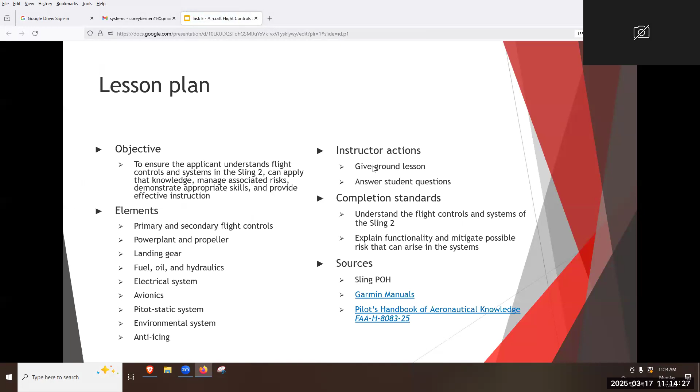All right, can everybody see this? I'm not going to put it in slideshow view so it's easier for us to bounce around. How does everybody feel with the primary and secondary flight controls? What are the primary flight controls? Cool. What about secondary?

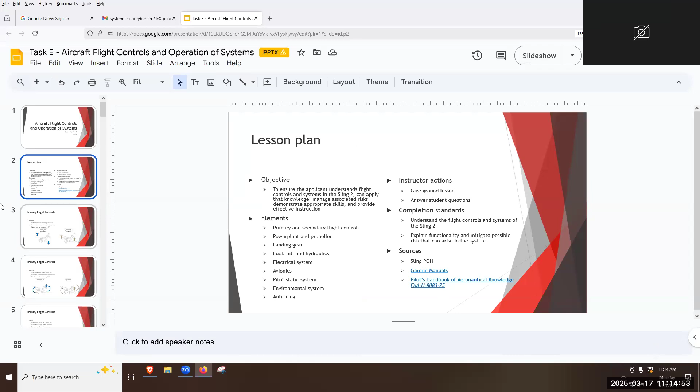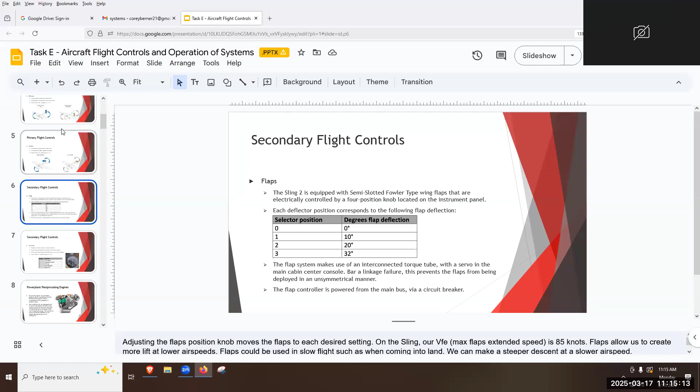Trims, flaps. Cool. On some other planes, not on ours, there might be other secondary controls like the spoilers and speed brakes, stuff like that. But for us, it's just going to be the flaps and trim. Are the flaps and trim mechanically or electrically powered? Cool.

So when given the question of describing the Sling engine, you can use the acronym RHANGO4, meaning Rotax 912 IS, horizontally opposed cylinders, air/liquid cooled, naturally aspirated, gear reduction box. Does anybody remember the gear reduction ratio? 2.43 to 1.

It's right here. No. Oh, it's on the board? No, it's. Oh, it is. Okay. It is on the board. Well, that's good. We weren't using those though. Good.

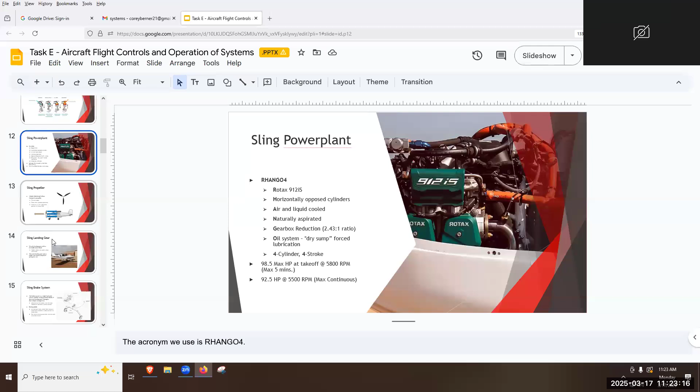All right. So fuel system, just some basics of the fuel system. We have the fuel capacity of 19.8 gallons per tank, making it 39.6 total. Unusable fuel is half a gallon per side, so 1 total. That's due to the fuel that's in the fuel lines or at the bottom of the tank. Our fuel burn is 3.5 gallons per hour on average, but we do have a chart in the POH that shows the fuel burn at different RPM settings. But we use 5 gallons per hour for safety and ease of calculation, just to give us a little bit of a buffer.

The average fuel pressure should be between 40.5 and 46.5 PSI. If you see anything lower or higher than that, it will start indicating yellow on your fuel pressure gauge. And then we use a combination of avgas 100 low lead and MoGas 91 octane. What color would pure avgas 100 low lead be? Light blue. So because we use that MoGas avgas combination, you're still going to see a very slight tint of blue, but it's going to look more clear than blue. If you just got avgas, it'd be pretty blue.

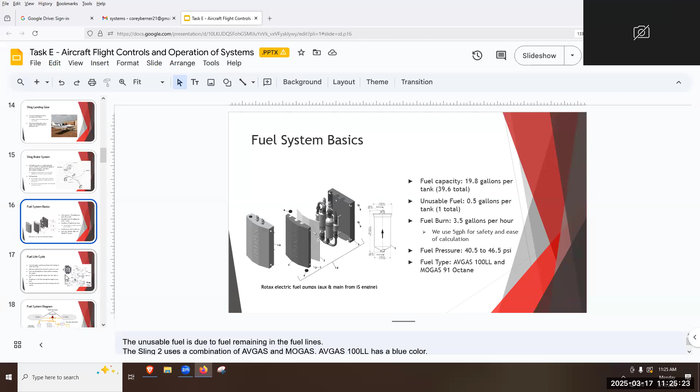Any questions about the fuel system basics? What was the general fuel pressure that you would see? Was it 43, 44? I would say around the 43 or 44 range. Yeah. Cool. Okay. So the life cycle. I'm just gonna read through this and then we'll go and look at the diagram.

We have 2 fuel tanks, left and right, located near the fuselage on the inside of the wing. Only 1 tank can be selected at a time, unlike the Cessnas, which use both. That's because they are gravity fed and ours is powered by a fuel pump. So we can only have left, right, or off selected. Hopefully you're not in this situation, but if you end up in an emergency where you have to turn off the fuel, you can't just turn it to off. You have to pull the little red circle knob in the middle, and then rotate it. So it doesn't just turn left and right like it does between the tanks.

You actually have to pull it up and then rotate. So I know in emergency situations, you don't think straight and you might be like, oh, why isn't it turning? Why isn't it turning? Well, you just have to lift up and turn.

The fuel runs through 3 different filters before reaching its engine. The fuel flows through the engine from right to left, and roughly 20 gallons of fuel flow through the engine per hour. I know some people have said, what was it, 22 or 23? Somebody was saying that a different instructor said that, but roughly 20 gallons of fuel flow through the engine per hour. Doesn't mean that it's burning 20 gallons per hour, it just means 20 gallons are going through the system. The fuel becomes pressurized after reaching the fuel pumps.

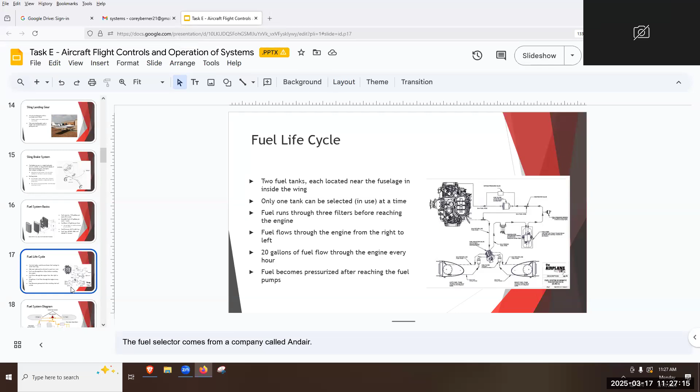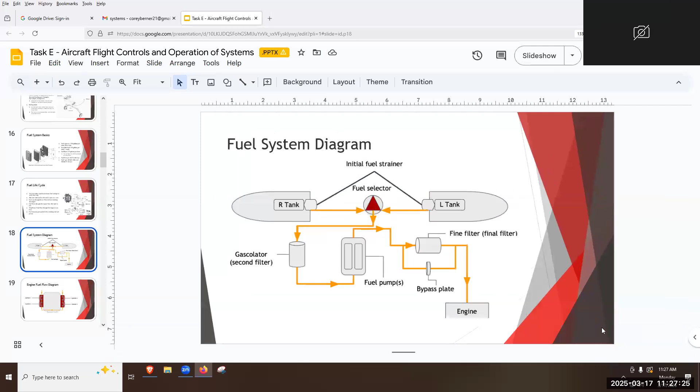So our fuel diagram, oops. Our fuel diagram is going to be right here. So starting from the tank that is selected, it's going to pass through the initial strainer. There's an initial fuel strainer by each tank. So regardless of what tank you have selected, it'll pass through the initial strainer. From there, it goes through the fuel selector and then through the gascolator, which is the second filter. It's also the lowest point in the fuel system.

So if you do find water or other contaminants, most likely it'll be in the gascolator, but that doesn't mean that you can't find it in the wing tanks as well. But the reason you would find water there is because water is denser than fuel. So when you do sump it, if there is water in there, it'll be at the bottom and then the fuel will be sitting on top.

From there, it'll pass through the fuel pump, which are electrically driven and powered by the ECU. We have a main and aux for redundancy purposes. From there, it's not on here, but after the fuel pumps, as we talked about, is where it becomes pressurized. So there is going to be a pressure sensor directly after the fuel pumps.

From there, it's going to pass through the fine filter, which filters out any very small debris or contaminants. So it is the most susceptible to become blocked if larger debris does make it through. Over time, it could block the fine filter, which is why we have a bypass plate, which will allow fuel to flow through that rather than getting clogged and stopping the fuel flow.

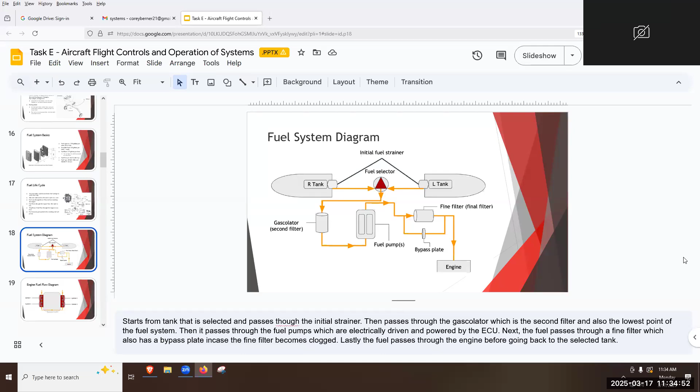Right. Cool. So as we mentioned, right to left. It's going to flow through cylinders 1 and 3, which are on the right, and then through cylinders 4 and 2 on the left, before going through the pressure relief valve and then back to the selected tank. Any questions on the fuel diagram?

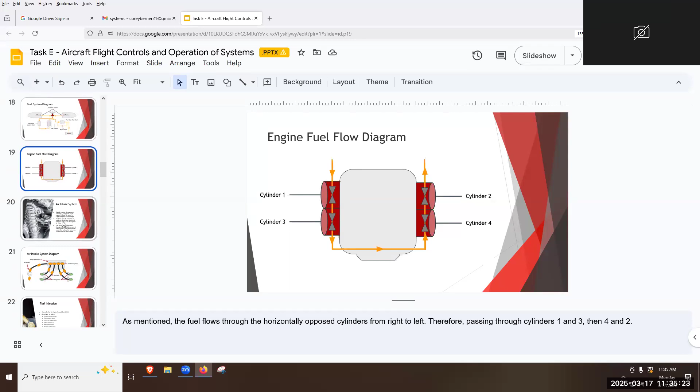So we'll talk a little bit about the air intake and fuel injection, since those are technically a part of the fuel system in a way. The air intake takes outside air, naturally aspirated, meaning it just flows into the engine compartment without assistance, supplied to the engine without a supercharger or turbocharger. Air flows directly from the air intake to the air box or the manifold, where it passes through an air filter. The filtered air is then sent through the manifolds to each of the cylinders' fuel injectors, where the fuel and air are mixed before entering the cylinder.

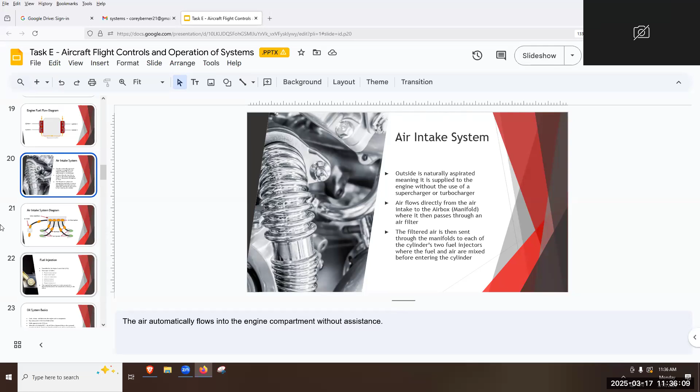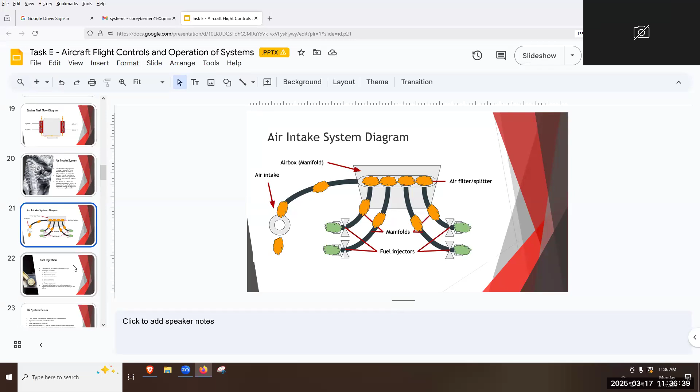So here's a diagram of the outside air flowing through the air intake to the air box or the manifold, where it then passes through an air filter. And then there are going to be 4 manifolds, like black hoses, I don't know if there's any on that diagram over there, that bring it to the fuel injectors. The fuel injectors then mix the air and fuel combination to cause ignition.

As we talked about earlier, the fuel injectors are controlled by the ECU, the engine control unit, which is the brain of the engine. It does it automatically through different input variables: throttle position, engine speed, intake air temperature, ambient pressure, manifold pressure, and exhaust temperature. Those are all variables the ECU takes into account when determining how much fuel the fuel injectors inject for that fuel and air mixture to be ignited.

So the air density, which is calculated in the air box, right here, determines how much fuel quantity is needed per period. And then from there, the spark plugs create the spark, which ignites that fuel and air mixture. Good?

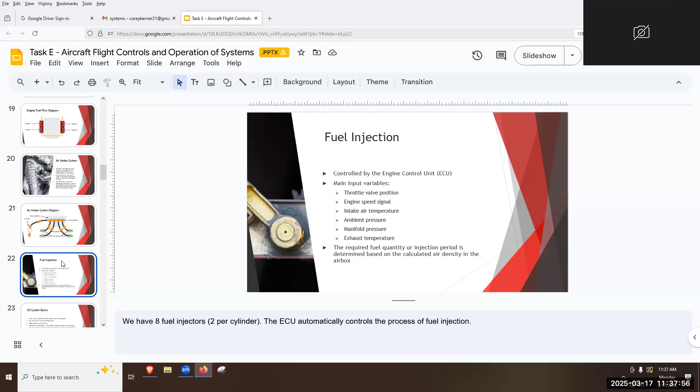All right, oil system. As we talked about, it cools, cleans, lubricates, and seals the engine and its components. It's dry sump forced lubrication. We have the external reservoir outside the engine, which then has to force oil back into the engine to lubricate. It holds approximately 3.5 liters. When the oil is below 50 degrees Celsius, the oil filter is bypassed due to the increased viscosity of the oil. Significant throttle settings must not be used during this period as it may cause damage.

Surplus oil emerging from the points of lubrication gathers at the bottom of the crankcase, from where it's forced back to the oil reservoir by piston blow-by gas. The oil used is automotive grade API SG synthetic or semi-synthetic. So we pretty much use car oil.

Yeah, and the reason we have the dry sump system is to help save space. If we had the wet sump, there'd be the pan at the bottom, like JT mentioned. It would require a lot bigger of a cowling.

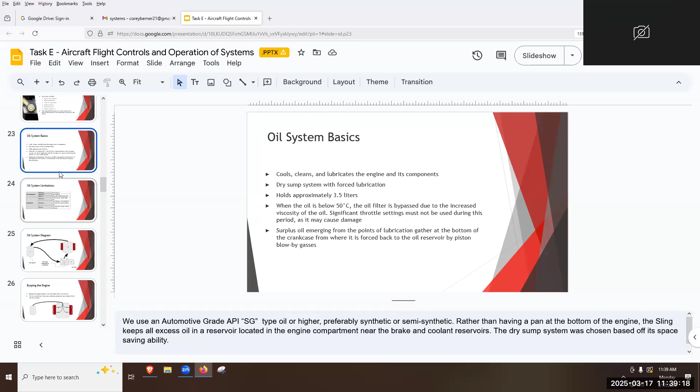Found in the POH, which may be different because they updated the new POH. But here are the parameters for the oil temperature and oil pressure. It's good to know. The system should indicate the oil pressure and temperature in yellow rather than green if it's starting to reach above or below these parameters, and then go into red when it's outside these parameters. They're found in the oil limitations in the POH.

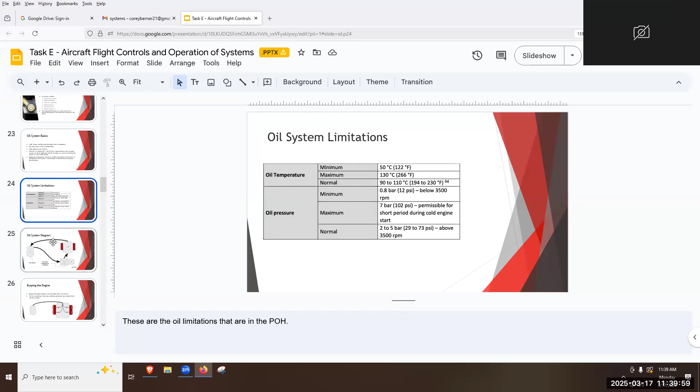So here's our diagram, four simple parts. We have the reservoir, which oil is pulled from by the oil pump, which is powered by the camshaft. It then passes through a filter before being directed to the engine. After passing through the engine, the oil goes back to the reservoir.

So if that oil pump for some reason goes out, then we will no longer be drawing oil from the reservoir through the engine, and not cleaning, cooling, lubricating, or sealing, which then inherently will most likely cause damage to the engine and probably shut it off. So oil is very important.

I just thought of this, but there's a war going on between Tacoma drivers and Jeep drivers, right? We hate each other, but why do Tacomas last longer than Jeeps? Because Tacoma drivers actually have common sense and know to get their oil changed on a regular basis. Jeep drivers can't do that. Are there any Jeep owners in here? No? I just towed last night. Exactly. There we go. See?

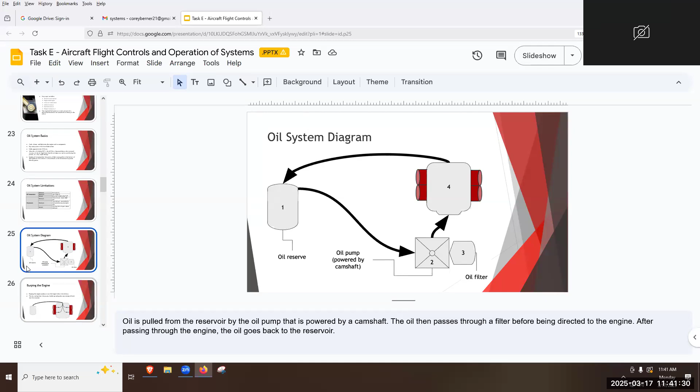But yeah, get your oil changed. Oil is very important.

Why do we burp the engine? I know it's on the screen, but why do we have to do that? To move oil that's stuck in certain places back to the reservoir, so you can get a count. Yep, so turning the propeller, there's going to be air coming from the pistons, which builds up and pushes any resting oil back into the reservoir to give us the accurate reading.

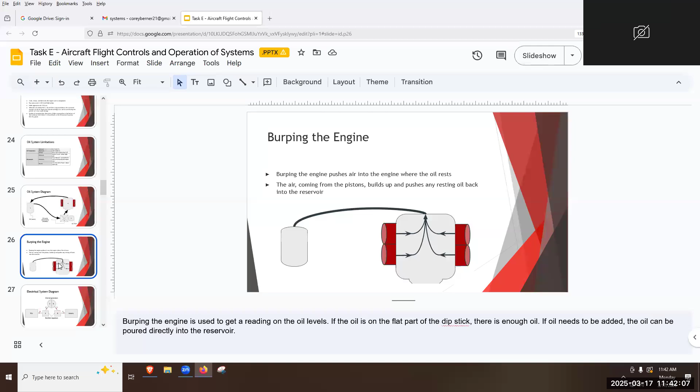Any questions on the oil system before we move on? Who understands the fuel system and the oil system? Who does not understand the oil or fuel system? Cool. All right, electrical system.

This is going to be very important for the Sling because a lot of things rely on the electrical system. We have two internal generators, generator A and generator B. They're both producing alternating current, which is then converted to direct current by the rectifier regulators. The power generated by generator A goes to the ECU, which controls the two fuel pumps, 8 spark plugs, and 8 fuel injectors.

The power from generator B goes to the battery, which powers the main bus, which then controls things like flaps, trim, lights, radios, avionics, autopilot. So we have a lot that relies on the battery. As we talked about before, some of you may not have been in here, but we had an in-depth conversation that probably lasted longer than it needed to about what a rectifier regulator is.

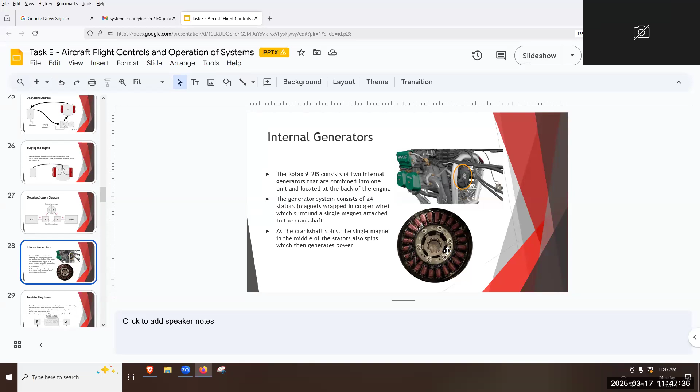Cool. So as we talked about the rectifier regulators, a rectifier is a device that converts an oscillating two-directional alternating current into a single directional current, direct current DC. And then the regulator is any electrical device that maintains the voltage of a power source within an acceptable limit. And as we saw, they're located on both sides of the fuse box, the little silver boxes on either side. So we have the rectifier regulator to convert the power, but also to maintain the voltage so we don't lose any of that power when we send it off to the battery or the ECU. Cool.

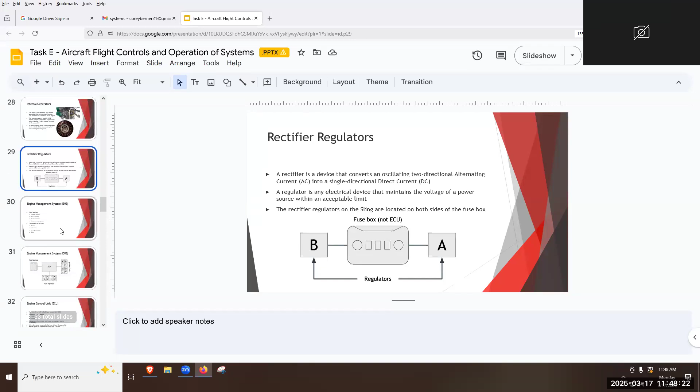Yeah, so going back a little bit to the engine, the EMS or engine management system is ultimately the overseeing entity of the engine. It's going to take care of ignition control, fuel injection, fault detection, and generator management. Within the EMS, there's different components such as wires, sensors, different harnesses, and the ECU, the ECU being the brain of the engine management system.

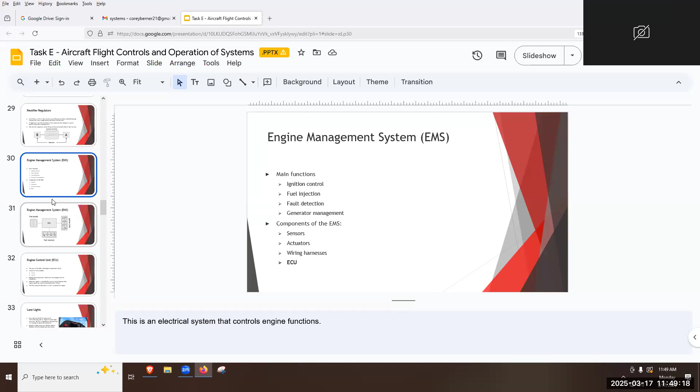So you can think of the engine management system as our entire body, us as people, and then the ECU is going to be our brain that processes and controls the important things within the engine. Here's just sort of a picture of the EMS. We have the ECU as the central core, controlling the fuel pumps, injectors, and the ignition coils. 2 spark plugs and 2 fuel injectors per cylinder, since we have 4 cylinders.

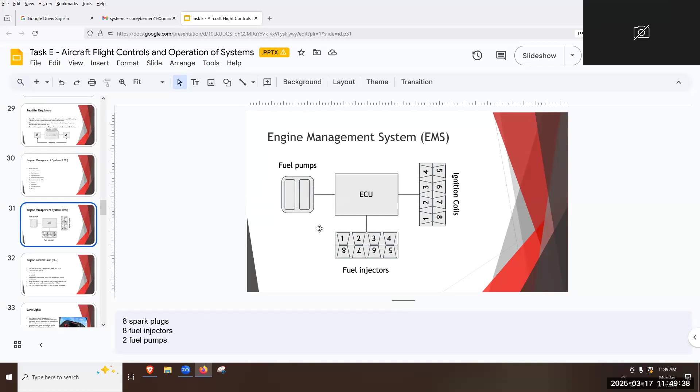Going more in depth about the ECU, engine control unit. It's the core of the EMS, and it consists of 2 modules. There are 2 computer modules, lane A and lane B, not to be confused with generator A and generator B. They're separate. During normal operation, both lanes are engaged for redundancy, just like with the fuel pumps, keep both on for redundancy. When it's controlled by lane A, lane B ensures that engine operation can be maintained after a failure, and the ECU automatically selects a lane to control the engine.

Lane A is the primary computer, lane B is a secondary computer. They're on the instrument panel, 2 switches with a light. The lights tell the condition of the 2 computers. So just like the check engine light in your car, if you see a lane light on, it's telling you that something is wrong.

We can then go into the settings page and view FADEC. FADEC is going to be like plugging the OBD2 sensor into your car at AutoZone, and it'll tell you what exactly is wrong. You can only see what's wrong when the check engine light is on. So same with the lanes: if the lane lights are not on, we can't see FADEC and what it's telling us to do, or telling us what's wrong. But once those lane lights are on, we could go in and view FADEC and see what the issue is.

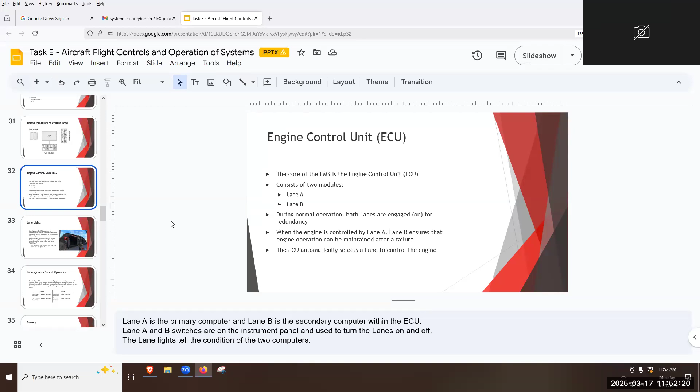And then if the other light's on, do the same thing, cycle it off, cycle it on. The light should go off and you should start feeling the engine run a lot smoother and see all of our instruments within the engine page. There is going to be, I don't think I have it, it might be at the end of this PowerPoint. But we'll get around to that. Yeah, so lane lights are the ECU's only way of telling us if something is wrong. Could be flashing or could be solid.

In flight, if both lanes come on, don't cycle one off because at this point you don't know if there's actually an issue with the engine and you don't know which one is the working one and which one is the faulty one. So if you have lane A and B on, and let's just say lane B actually has an issue, and you decide to cycle lane A, the only working lane, off, then you could lose your engine. So in that case, you just want to land as soon as possible. You don't need to do an off-field landing, but just get back to an airport as soon as possible.

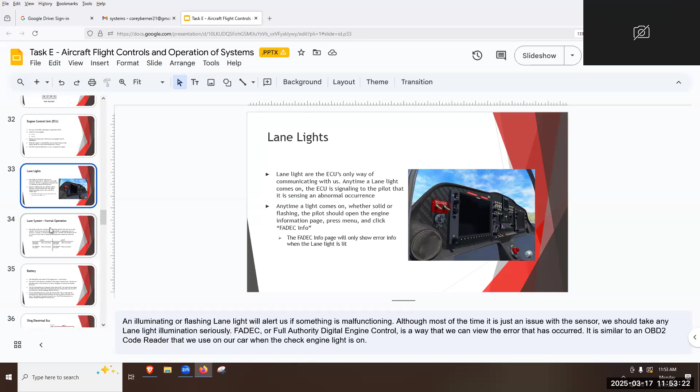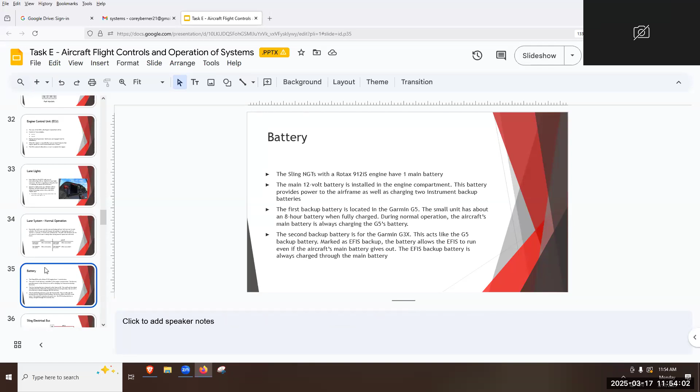Yeah, so essentially each lane controls one spark plug and one fuel injector in each cylinder. The ECU can and will change the number of spark plugs and fuel injectors it controls. It could be any combination. We don't know about it. The ECU just does that automatically. But here we have 4 spark plugs and 4 fuel injectors on either side, controlled by lane A or lane B. Any questions with the electrical system so far, specifically with the lanes? Just go back to the lane slide.

Correctly, so lane B, it says it has 4 total spark plugs, it has 2 per cylinder, so lane B is running either 2 and 4, or 1 and 3? Yeah, so that's 1 per cylinder. This is saying generally speaking. Oh, they're running simultaneously without an issue? Yes. But this is generally speaking; as we know, the ECU can, if it wanted to, dedicate lane A to control all of them, and we just will never know about that. We don't have any gauges that will tell us that. It's just sort of a trust system. And these A and B lanes, they're essentially part of the ECU system, so there's not an external loop anywhere else, it's just part of that.

Yeah, so I usually avoid doing this because lanes are a very complicated thing to understand, but they're literally just computer modules. They're sort of computer modules, but when you draw it out, this is making it way worse. When you draw it out, we have the generator, rectifier regulator, direct current, ECU. You could, if you wanted to, draw it out like that to signify lane A and lane B are under the ECU's control. But then that might spark the question of, oh, well, go ahead and tell me about the lanes. What are they? And that's a conversation I don't want to have on a check ride.

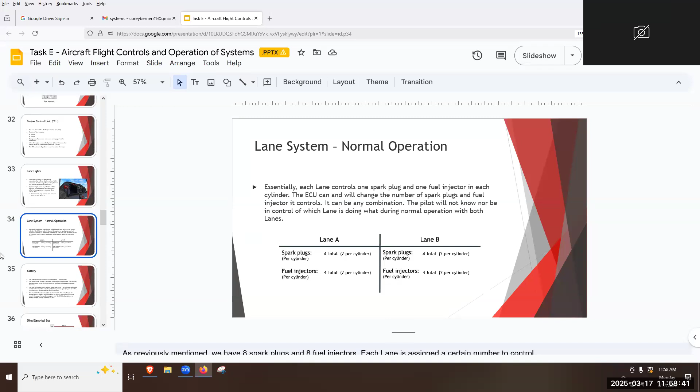Good. All right, so the battery, we have the one main battery, which is the 12 volt in the engine compartment. Battery provides power to the airframe as well as charging 2 instrument backup batteries. First is going to be located in the Garmin G5 that has about an 8-hour battery life when fully charged. During normal operation, the aircraft's main battery is always charging the G5's battery.

The second battery is for the Garmin G3X. This acts like the G5 backup battery. It's marked as EFIS backup, and this will allow the EFIS to run even if the aircraft's main battery gives out. This is always charged through the main battery. So we're going to have the backup for the G5, backup for the G3X, the main battery, then not necessarily associated with the electrical system's charge, we'll have a 4th battery, which is going to be the ELT, which is its own separate battery.

And just out of curiosity, I just found out about this, but supposedly the ELT battery is located under the right seat. So the CFI side seat, if you lift up the seat, that ELT battery will be there. The rest are located within the engine compartment and/or instrument panel.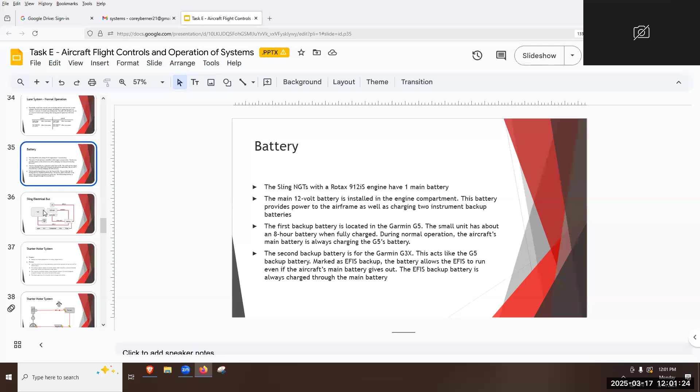And then from the battery, which is powered through the main bus, we have the avionics, autopilots, all these things, and then EFIS 2 to the G5. Any questions or concerns or complaints regarding the fuel system, oil system, or electrical system thus far? Pull back just the battery, this, next to diagram? Yep. Cool. There's essentially just a diagram of the things that the battery provides power to.

So I'm just looking at the fuel system and the POH, looking at the diagram, it mentions a feed pump between the selector valve and the gascolator, but I never see that mentioned in any of the other diagrams. So this might be one of the new things they added. Don't know if it was in the old POH. What page is it on so we all can find it? 7-20. 7-24.

This is new. This is new. You said it's where? After the gascolator or before? Before, between the selector valve and the gascolator. Alright. Paper POH doesn't list it. And then what was it called? Oh yeah, the system diagram key down below calls it a feed pump. A Facet Posiflow fuel pump. And that is I.

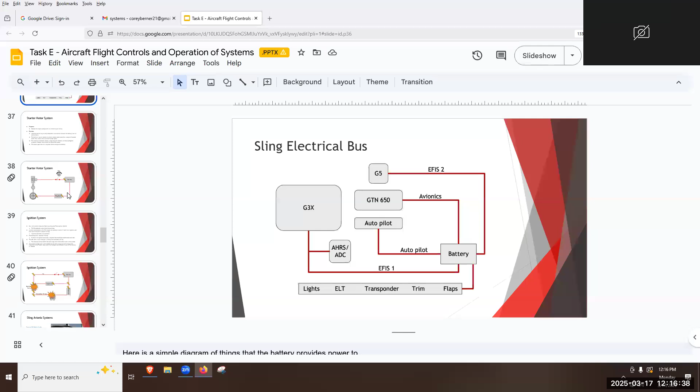Around the neighborhood, like, okay, I know how to drive manual still. He's like, let's go to the Strand. Dude, it was like 11 p.m. He's like, just go. I went, and it was literally like we went 0 to like 150 in what seemed like seconds. It was so much fun. It's fast, it's a big heavy Jeep, and it's got the big old motor in it, and it just pounds through gears, cause it's got the little selector on the side. It's got paddles and it's got the selector. The paddles are delayed by like 2 seconds, so you hit it and then it shifts, it's like a second delay, which kinda sucks.

But she's still learning gears and stuff, so every time I drive, it's fun. That was fun. Yeah, my buddy, his dad owned Wash and Go, the car wash company, and they sold it. So he bought a Ferrari after that, a 488 Spider. So cool. And he took me in it because I used to do all the maintenance on all their cars. We were going so fast down the Strand, and it's got radar deflectors on every panel

of the car. Really? Yeah, we flew by a cop that was sitting over at Fiddler's, and they won't even chase you. Once you're going a certain speed, it's not even worth it, because they can't catch up to you. That's like Tokyo Drift. I remember that movie. They're like, "Are you worried about the cops?" And they're like, "No, once you're over a certain speed, they won't do anything, because they can't touch you." It was the craziest thing I've ever been in.

That and then an i8 Roadster. With a hybrid V8, I think. Yeah, twin turbo V8. Besides that one, the craziest car I've been in, maybe this is pathetic, but it was probably a Challenger Scat Pack or something like that, a Charger Scat Pack. That's still fast. It's the same motor that's in this Jeep. It's a 392 Hemi. Oh, they're fast. It's crazy, it's insane. Yeah, I'm a car geek, so I love it all. I don't identify as a car geek, but it definitely gets me going.

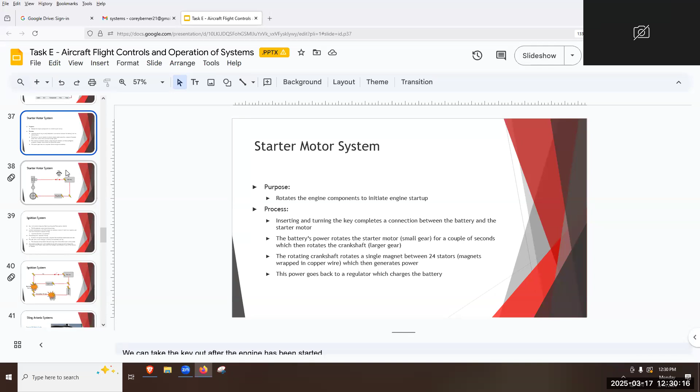So that process is going to look like this. We have our battery. As we turn the key, it completes this connection. That power from the battery goes to the starter motor, which turns a smaller gear, then a larger gear, which turns the crankshaft that has the single magnet attached to it. That's between the internal generators, the 24 stators. From there, that power is sent to the regulator and then back to the battery to charge. So this whole process happens one time just to get the crankshaft spinning, and that sort of magnetic energy into mechanical energy.

Make sense, everybody? So after the engine has started, you can turn the key to the left and pull out the key, and it's not going to shut the engine off. The key is simply just to complete the connection between the battery and starter motor.

I remember my first solo outside of the traffic pattern into the practice area. I was obviously a little nervous, you know, I'd soloed one time before, it was only in the pattern, so this is my first time going out into the real world. And I went through all my checklists and started my engine.

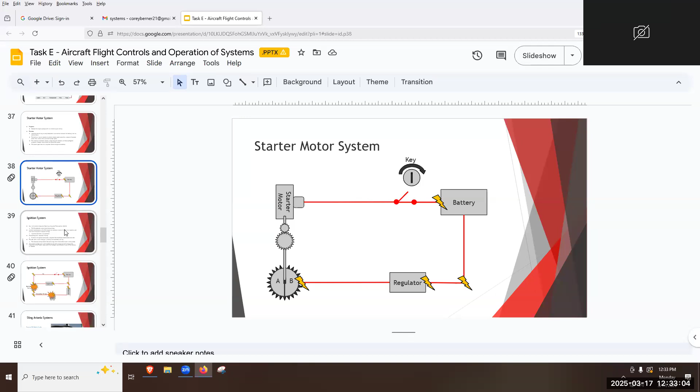The ignition system. So this is what's happening continuously to keep the engine going. Our ignition system, which hopefully in the new updated POH they talk a little more about, is called a dual contactless capacitor discharge magneto-type ignition system. So it's kind of a mouthful. For the engine to continue to run, the ECU demands a spark from the spark plug. So that's what's happening during this process.

There's going to be a switch, which is controlled by the ECU, which allows the battery to send 12 volts to an ignition coil. That ignition coil is just an iron core wrapped in copper wiring. There's 4 ignition coils total, 1 per cylinder. The process that takes place is the electromagnetic induction theory. Friction in the ignition coil causes a magnetic field to collapse, which creates 40,000 volts. On a smaller scale, imagine socks on, dragging your feet on the carpet, and then you touch a piece of metal and it creates a little spark. Very similar concept.

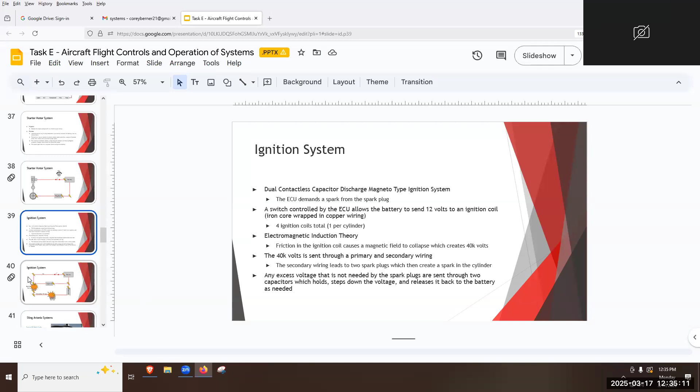This is sort of what it looks like. It looks kind of funky. It's supposed to be animated, but because we're using Google Slides and not PowerPoint, let's see, maybe I could restore it. Because I want to show you the work that I'm proud of.

Doing it for a week. Say what? Doing it for a week. Okay, I don't remember, about a week. You just sit down and it's like, dang it, it's not working, man.

So first, you guys see this? Yeah. I know Ollie on Zoom, you can't see this, but this is the animation of what we've already covered. So this is for a starter. Boom, key turned. Completes the connection that allows power to go to the starter motor, which then starts turning those gears, turns the crankshaft with the magnet between the internal generators. Boom, that generates power, goes to the regulator. Boom, regulator, back to the battery.

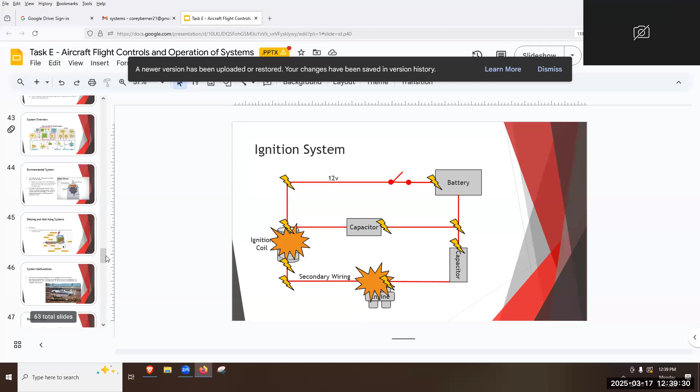So those are like the main systems. We had oil, fuel, electrical, starter, and ignition. When I went through my training, a lot of these systems weren't really well known, like the starter and the ignition system weren't ones that were really taught. They weren't anything I talked about in my private pilot check ride, but should have because they're pretty important. They only were electrical and fuel and the oil. So now you guys are more knowledgeable than I was at your phase.

Is that what you need to know, like all this, for the check ride? I hope so. Yeah. You can ask it. Well, I wasn't sure if they're gonna ask the ignition system or not. I don't know, but Corey in particular is not like that. If you're gonna get in an airplane, well, I'm a firm believer you should know more than you actually need to know. You should show up to every single check ride more prepared than you need to be.

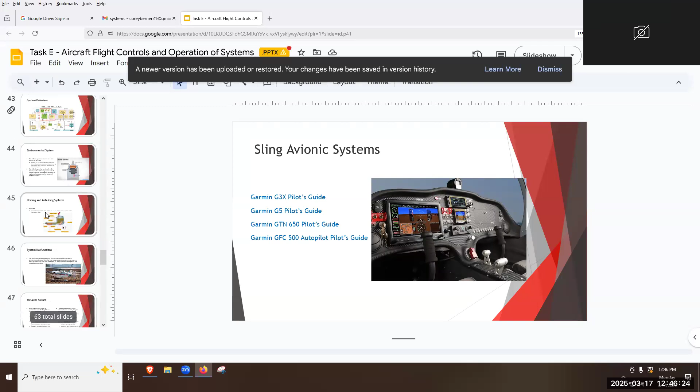If nobody has any questions, we can end it here. Otherwise, I'm more than willing to answer any questions or talk about any sort of emergency scenarios. If anybody just wants to think of, well, what if this happens? What would we do? I got an emergency scenario that one gave me and I couldn't figure out the answer to it.

So I was on a flight from, let's just say, Santa Rosa to Monterey Bay. And he told me it was foggy there, coastal fog came in and covered the whole area, all along that side of the mountain. And he said, what would you do in this scenario if you were required to land within that area, you had a meeting you're supposed to get to, and it was all fogged up? I said I'd make a 180, go back to the home airport. He said, nope, you can't, it's fogged up on that side too.